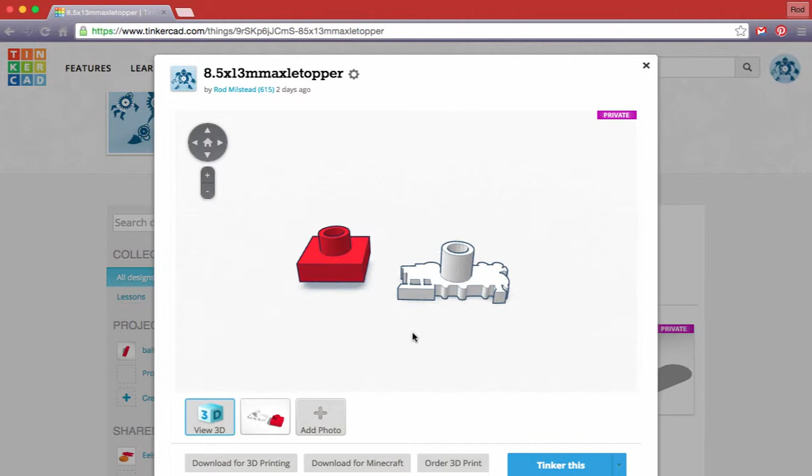Okay, so here are two designs that I made in Tinkercad. You're going to make a total of 4. In this case, I chose to make mine with an offset so that the design is separate and above the actual shell. I'll also show you how to make these where the shell is integrated right into the shape itself. So let's get started.

Okay, so we're in Tinkercad. At this point in your workflow, you should have already made and recorded the measurements for your axle cap. Remember what we always say, measure twice, cut once. In this case, measure twice, 3D print once.

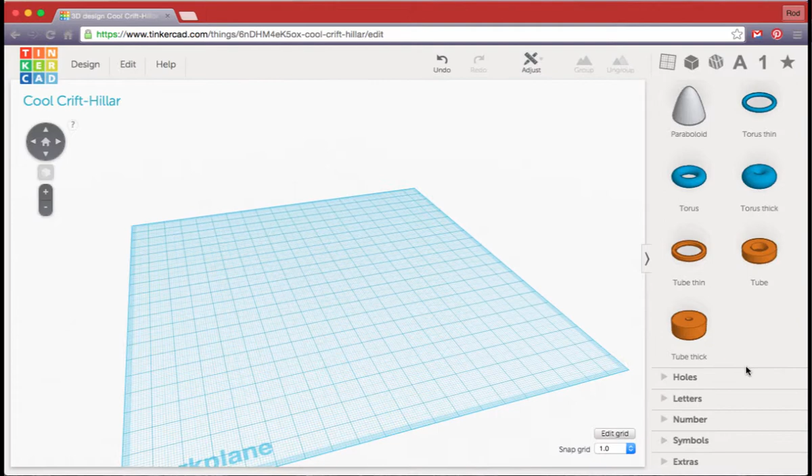So you can start with either a cylinder hole or a hex hole for this design. If you're going to start with a cylinder or hex, there are a couple ways to do it. With the cylinder hole, you could just jump and grab one, but I will show you the way to convert anything in Tinkercad into a hole shape.

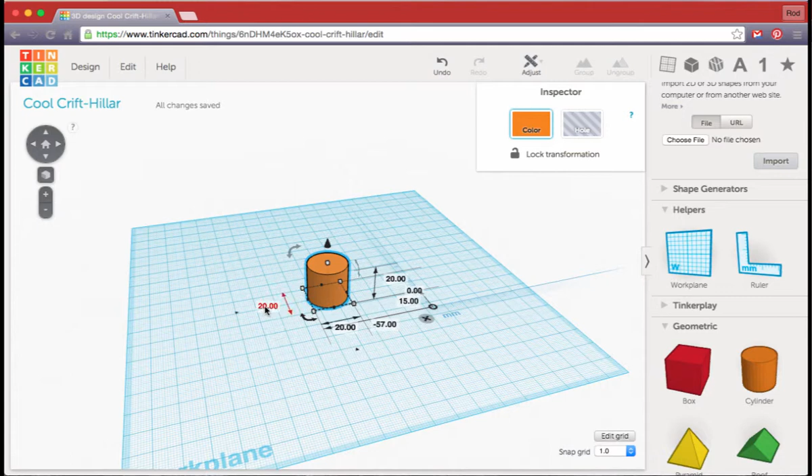So I'm going to drag a cylinder over. I'm going to drag my ruler over. And the reason I've got the ruler there is that once I have the ruler in place, I can modify my measurements. Now I'm working in millimeters today, so hopefully you are too for this project. And you are seeing me drop in some measurements. Don't assume that mine are correct. Notice I did that by clicking on each number and making the change.

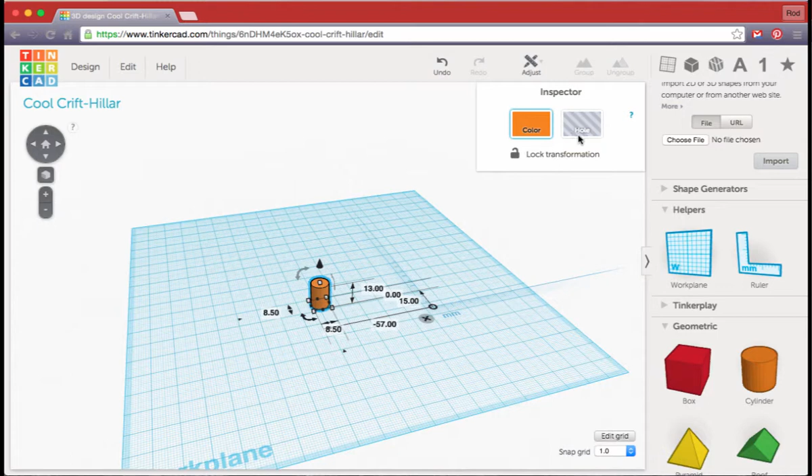Now I want to convert this shape into a hole. It's very simple. Top right, click on hole, and there we have the hole shape that will fit over the end of our axle. Now before you do anything else, I'd like you to make a copy of this shape.

Go to Edit, Duplicate. Where's your copy? Watch, friends. Click and drag. There it is. That way you don't have to keep recreating it. If you want to make another copy, duplicate.

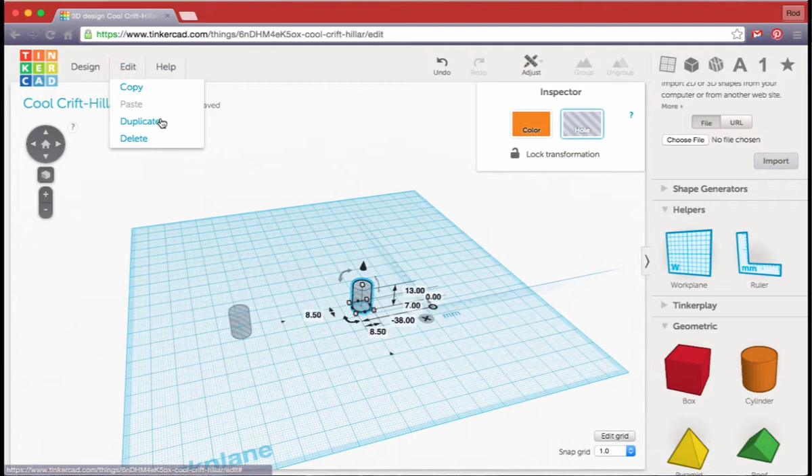Remember, you're going to make a total of one of these for each of your gears. You'll need at least 3, and for most of you, 4. You can put those ones you don't need off to the side.

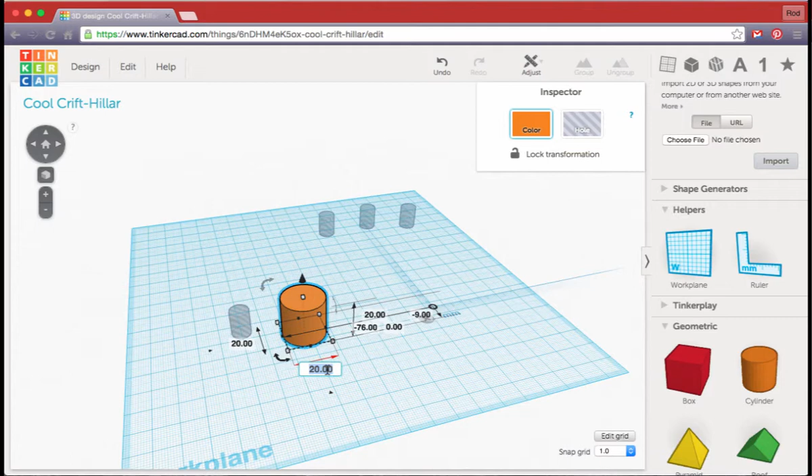Okay, so first thing I'm going to show you how to do is to build the shell itself as a cylinder. So I'm going to grab a solid cylinder, and the measurements of my hole are 8.5 by 8.5 by 13 high. I'm going to change my measurements here. I'll go for 13 by 13, so I have a perfect cylinder, and I will make the height 12. You'll see why in a second.

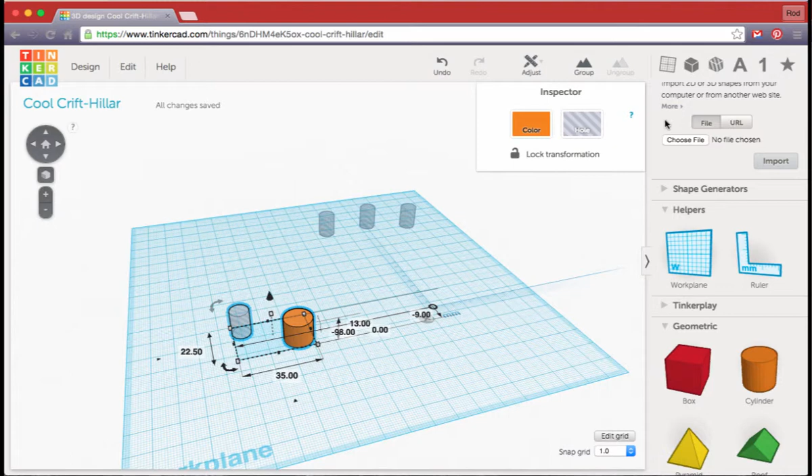Now I'm going to click and drag, select both, go up to Adjust, Align, and I've got the alignment tool. I'm going to click on the following dots. Watch closely. Center that way, center that way. Now the reason I made the solid orange cylinder slightly shorter is so that I know that I have a nice punch through that orange cylinder using my hole.

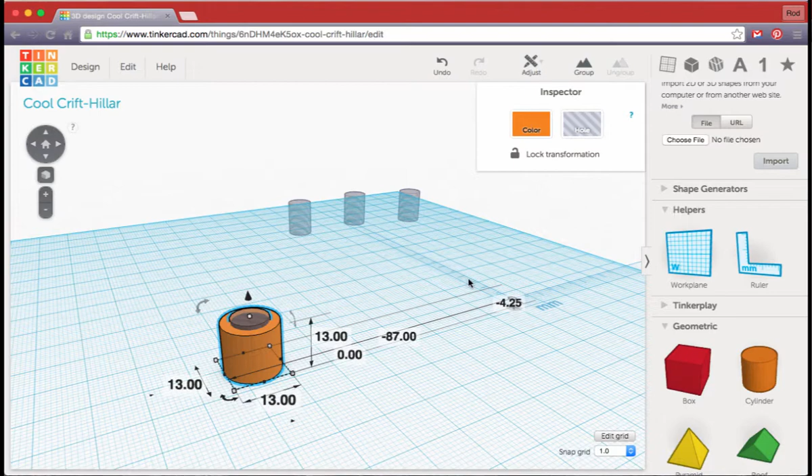Then I'm going to click and drag across both and go to Group. And now we have a cylinder.

Okay, so this is the type that will have an end cap, like I showed you in the earlier example with a train. So I've already converted a file from a vector graphic to an SVG. The link will be in the description, so you know where to convert your own. Remember, silhouettes work best. So here I go in the import section on the right side.

I'll click on Choose File. Now I've already downloaded my SVG and saved it. Make sure you pay attention to the location where you save yours. It's called trainsil.svg. I'm going to open it up.

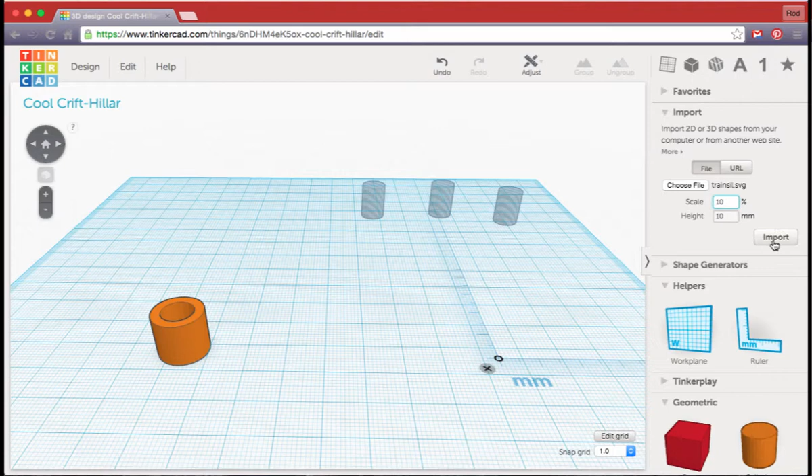If you haven't worked with the import tool before, it's worth knowing that the scale, I always recommend dropping it to 10%. The height you can leave at 10 millimeters unless you're ready to modify that now. But 10% is really important, that way the size of your piece often comes in manageable. I will click on Import.

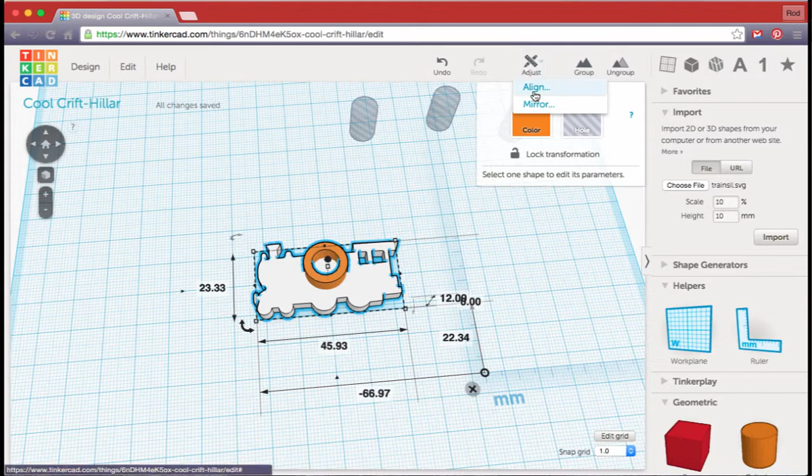And there is our train. Now I am going to change the thickness of this to 5, and I'm going to bring my orange shell over. I'd like this to be centered, so I'll click and drag to select both. Adjust, Align, center in one axis, center in the other.

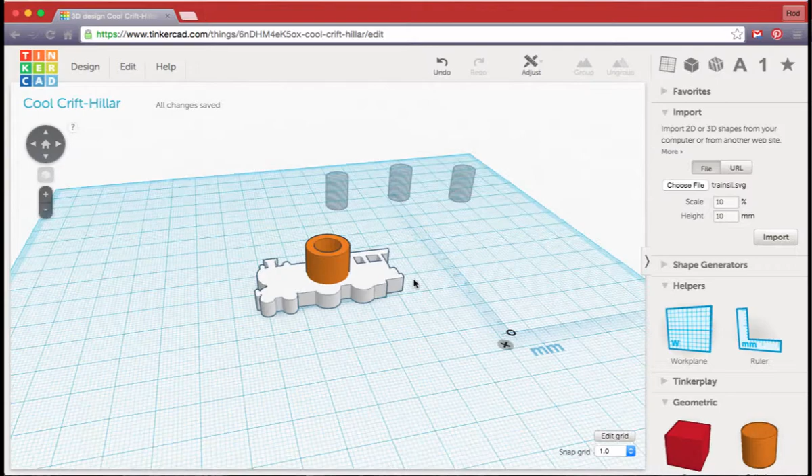For your last move here, before you group these two shapes, you probably want to lift this up so that you know you've got a good joint between the two. We don't want any gaps, but at the same time, I want to have nice clearance for that collar or axle that I'm building. At this point, I'm going to select both and go to group.

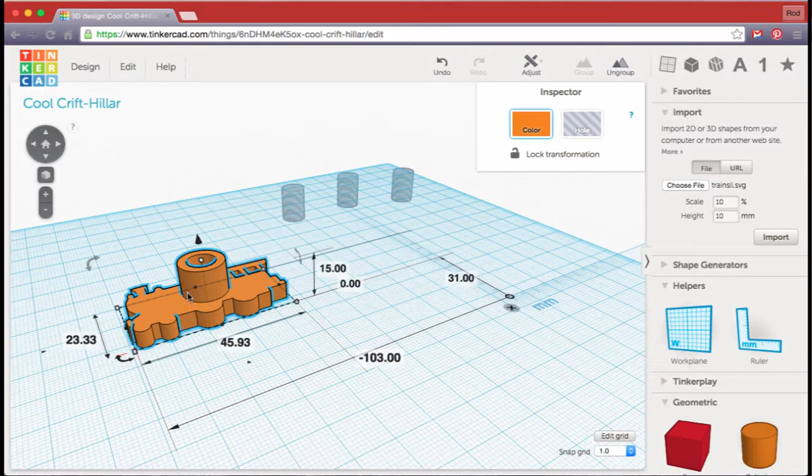So if this was your only design, or if you're following this style for all of them, I'd like you to submit them with the top, which is the train in this case, face down. That way, as it builds, you won't have any issues with any extra material that's called scaffolding that you have to pull out of that cylinder hole.

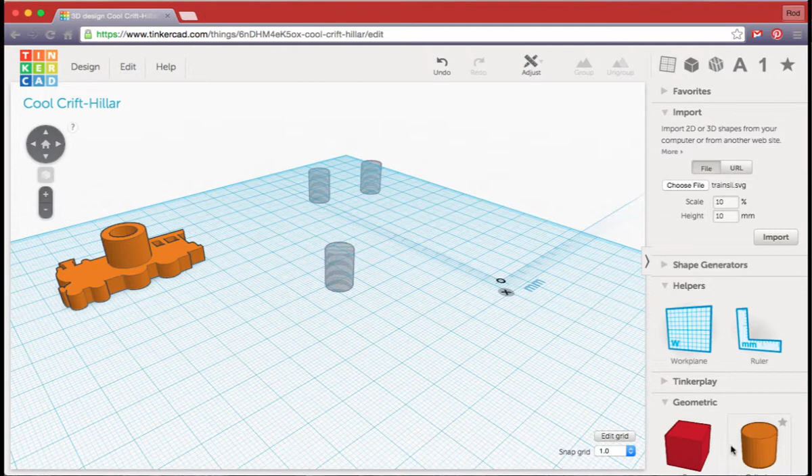So that's one style we can make. I'm going to grab another one of our cylinders here and talk about another type that you can build. This is one where we're going to embed that hole into the shape itself. So let's take a cone.

I'm going to select the cone and the cylinder hole. Go to adjust, align, you've seen this before by now, and center those two. Now, if you notice on this design, the hole is actually poking through or interrupting the outer shell, so that would be a problem.

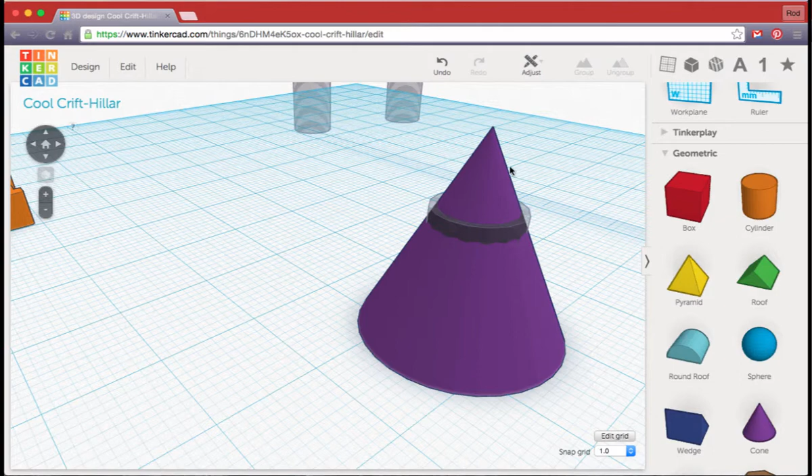There are two ways to deal with this. One is to lift the cone up, or another option, let me put that back down, zeroing out my measurement, is to hold down the shift key and enlarge the cone, but I've knocked it off center, so I need to select both, go to adjust, align.

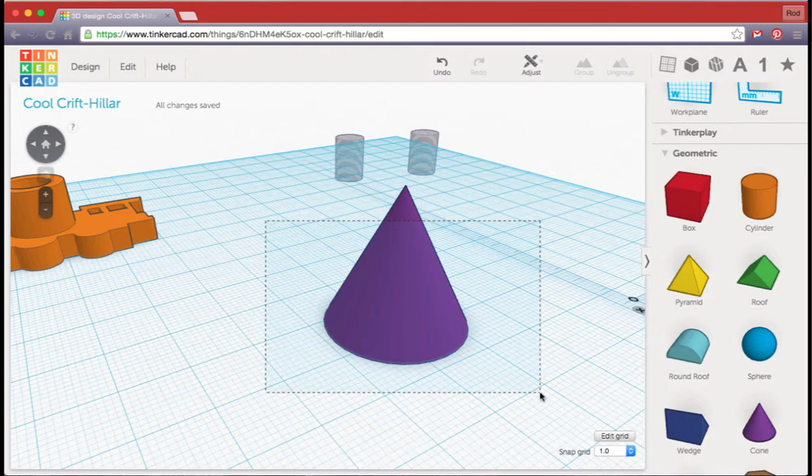And center in both directions just to make sure. And now I will select them both one more time and group them. As you can see, now that they've been grouped, we have the center hole in the middle and underside of our design. Now, this is the way that I want you to submit this type of design, but keep in mind, if you think of this as a cross section, right? There's a center hole right there. As it prints, it has to fill that shape with supporting material that you will have to clean out.

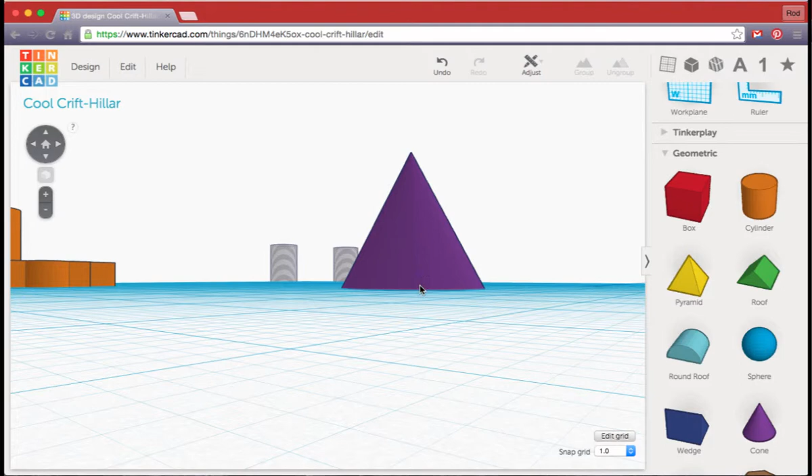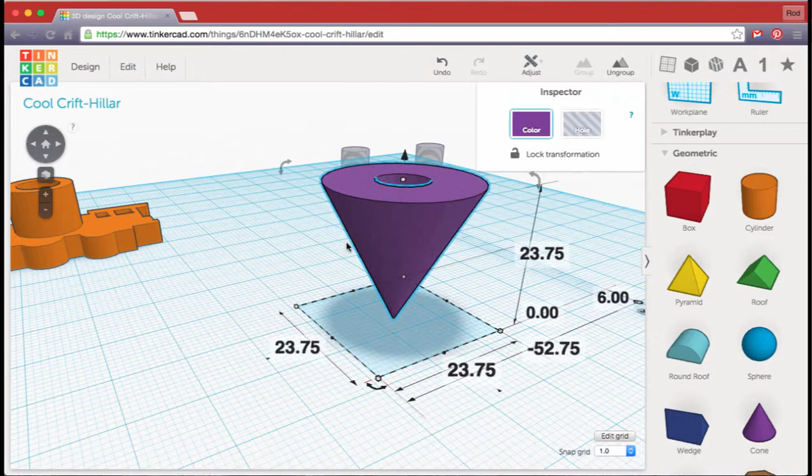Now, what if we printed this upside down? It's a fair question. Let me rotate this. What if we printed it like this? Well, then the center hole would be clear, no worries. But you would have scaffolding supporting it all the way around that you'd have to clean up, and it would take longer as well. So it really comes down to the look that you're going for and also where you want your scaffolding with this type of design.

So that is 2 out of 4 designs right there, friends. Remember, you need to have one for each gear. They should all be unique.